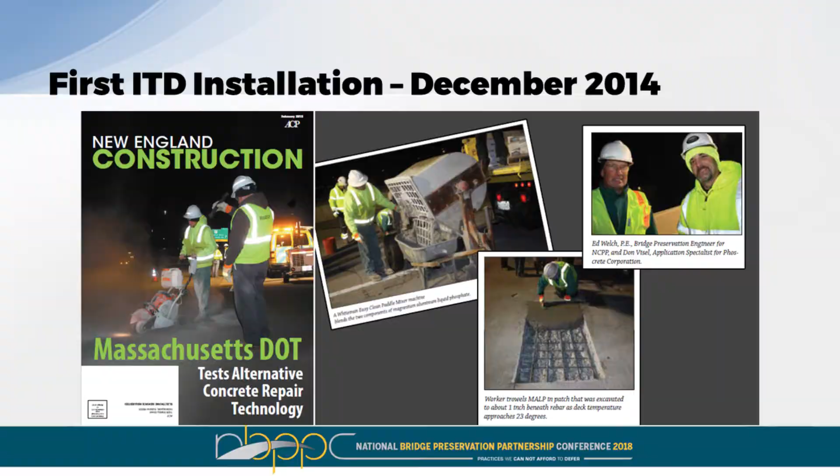3.5 years ago, MassDOT was one of the first invited agencies to hold a demonstration, and they selected a bridge on I-190 near Exit 1 in the city of Worcester that crosses over the Providence-Worcester railroad tracks. And you have to know how to pronounce Worcester.

Does Mohammed Nabulsi happen to be in here? Hi there, Mohammed. This was your project and your crew. A bunch of key MassDOT personnel were on staff, including Mickey Spillane, who was the assistant bridge engineer. Phoscrete Corporation's representative was Don Visel, our installation application specialist, and a young Ed Welch, PE for bridge preservation for the NCPP. He was on site as well to represent the AASHTO TSP2 program.

So the manufacturer's involvement is pretty straightforward. We provide on-site installation support. We contract and compensate the consultant to document the information, and we're responsible for following up on all the follow-up inspections. The independent consultant is really the key to the success of this program because the independent consultant will document all of the installations, the good ones, the bad ones, and the ugly ones.

And finally, the owner's commitment is to identify the location, to purchase the material used for the repair because they've got to fix it anyway, to provide mobilization and installation, and to perform scheduled inspections. From the manufacturer's experience, Phoscrete's MALP technology was the guinea pig for this ITD pilot program. Our magnesium alumino liquid phosphate concrete repair materials are cementitious materials that don't use Portland cement and don't use water.

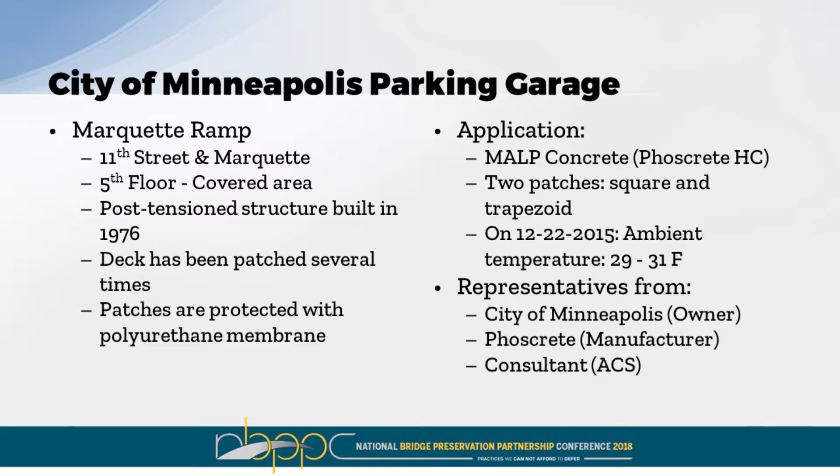The application entailed just a horizontal concrete repair, 2 patches that in the slides I called square and trapezoid based on their shape. It happened at the end of December in the morning. The temperature was between 29 and 31 Fahrenheit.

There were quite a lot of people at the application. 4 people from the City of Minneapolis, 2 engineers and 2 people who were experts in application, the technical consultant from Phoscrete, and myself as an independent consultant.

As for the size of the patches, the trapezoid patch was 2 by 2 feet, 4 inches deep, and the bars were free, so the concrete was removed beneath the bars, while the square patch was almost the same area, 2 by 2 feet, but less deep, so the bars remained partially embedded in the concrete.

Classical procedure for concrete patching: cutting the edges, cleaning the rebars, concrete surface profile 5, and dry concrete, because this is an important requisite for MALP concrete.

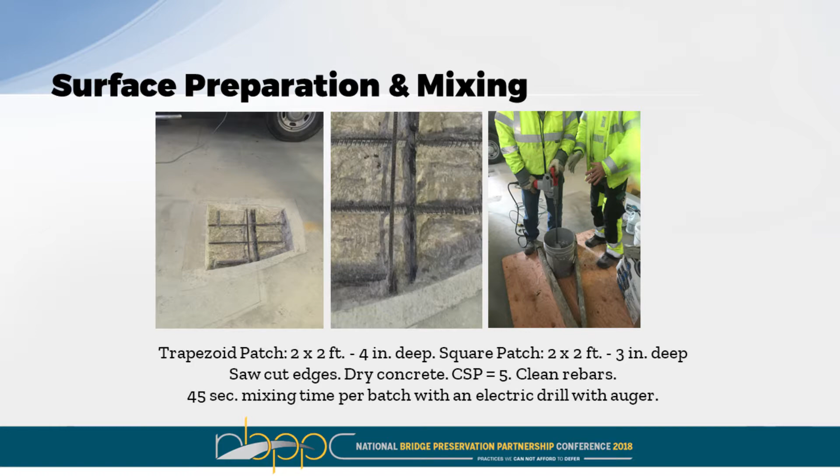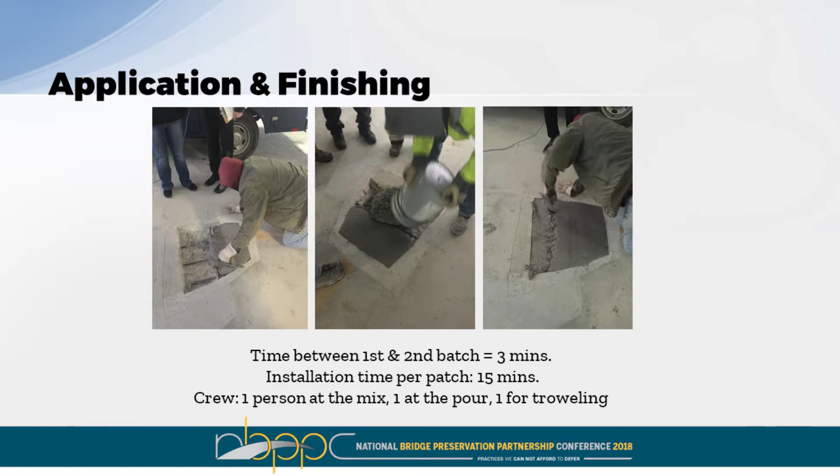45 seconds up to 1 minute of mixing time with an electric drill and an auger, and 3-5 minutes time between the first and the second batch. It took 2 batches per patch, and didn't take more than 15 minutes to complete each installation. 3 people working, 1 at the mix, 1 at the pour, 1 for troweling.

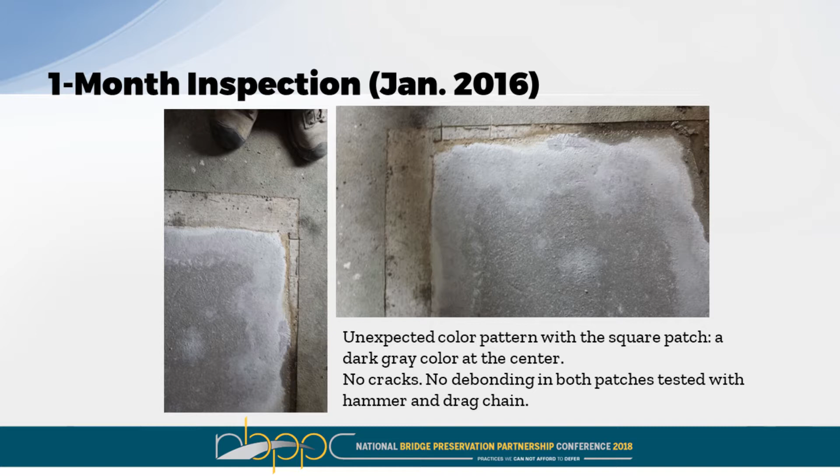The installation was completed between 10 and 11 a.m. At noon, the parking was reopened to traffic. Those 2 areas were reopened to traffic. Then I came back 1 month later. It was even colder because we were in January, and everything was fine, except that the square patch had a sort of dark gray area at the center. It looked as if there was a puddle of water, and we couldn't explain it. It was only in one patch, not in the other patch.

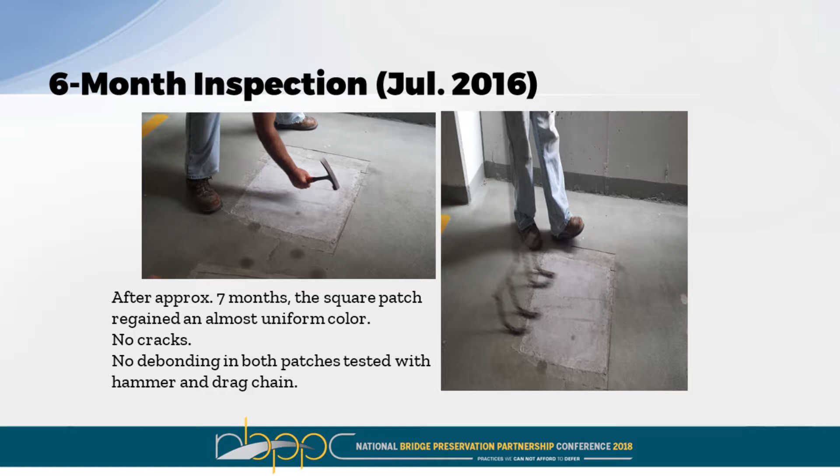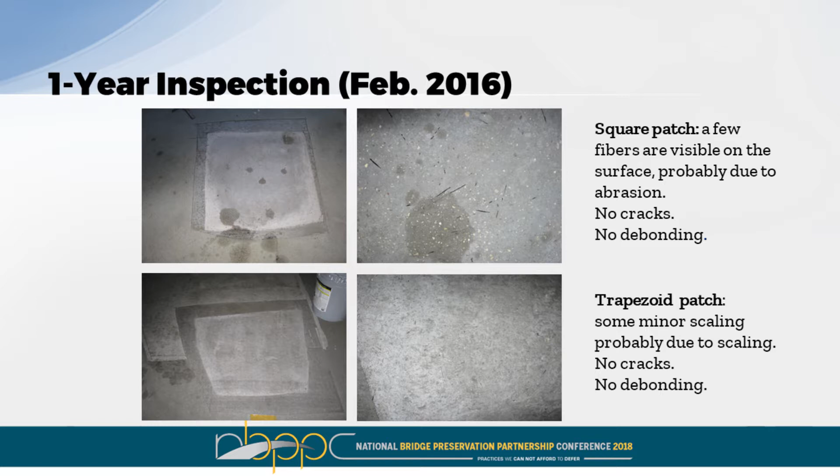Then we tested adhesion with the hammer and the drag chain. At a 6-month inspection, the dark area disappeared. Again, testing adhesion with the hammer and drag chain. No debonding at the edges, no cracks. After 1 year, we start seeing something different. For example, the square patch showed some fibers on the surface, probably due to the abrasion. And the trapezoid patch showed some minor scaling, probably due to scaling by the deicing salts. In both cases, no cracks, no debonding.

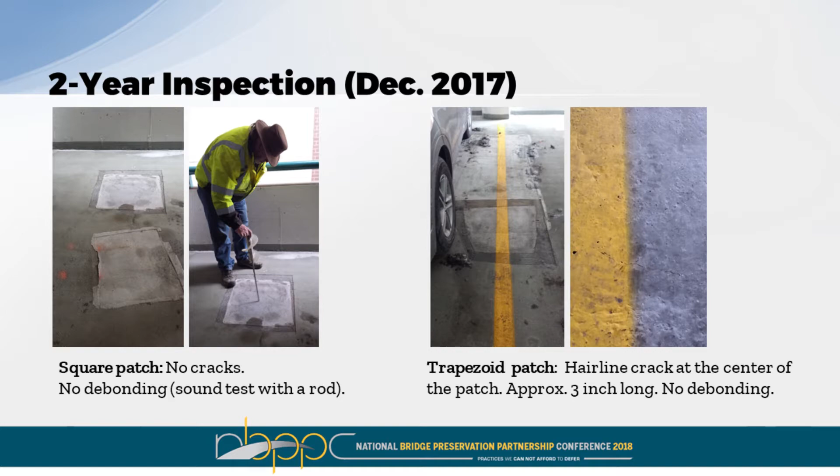At 2 years inspection, we finally saw one crack. It was in the trapezoid patch, a little hairline crack, about 3-inch long. No debonding, and the sound test. This time we didn't have the hammer, we did it with the rod. In both patches it went well. Now the goal is to go back in 3 years for the 5-year inspection.

City of Minneapolis is happy with this installation. They are not going to protect the patch like they do with the other technologies, because even if the patch is not particularly aesthetically pleasing, it's just gray concrete. For them, it's a big saving if they can avoid covering the patch with a membrane. And they also wanted to evaluate thoroughly the durability of this MALP concrete Phoscrete technology without any protection.

Thank you very much, Lorella. Next, I'd like to invite Walt Peters. He works for Oklahoma DOT and Bridge Division. He's an assistant bridge maintenance engineer, graduate of Texas Tech University, married with 3 children, and he's up 2 grandchildren on me.

So from the owner's perspective, I just see a lot of salesmen. Everybody's got great products. Sometimes we refer to it as snake oil. Sometimes it's great stuff. So I need to figure out what works. And to do this, we have some bridges with soffit issues in our state. We used a lot of bridges for a while where we put epoxy green steel on the top layer, and we put black steel on the bottom layer. And inevitably, we have these 5-foot openings in our TRL or our parapets, and a lot of moisture runs under the bridge, and the next thing you know you're losing your concrete on the underside of the rail. So I thought this would be a good challenge for this product. If it's going to work in that application, it'll probably work in a lot of the different corrosion issues that we have in my state.

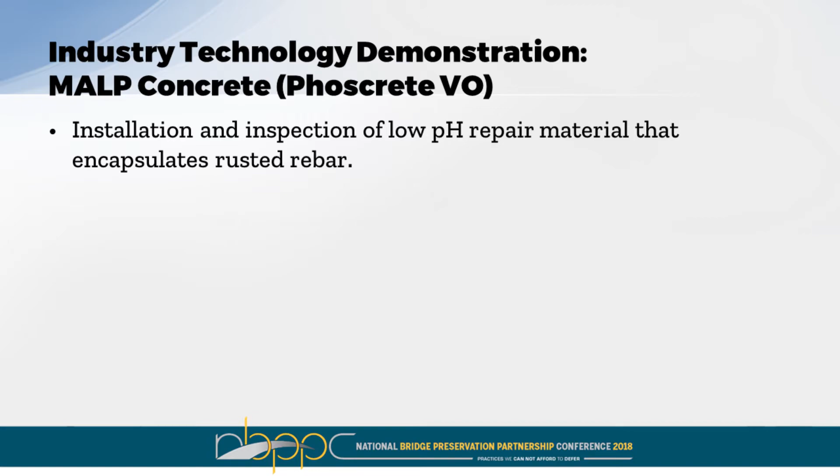So I understand that this product has a pretty low pH and that the halo effect is prevented mainly because it's going to have a lower pH than the remaining material, even if you got a little bit of carbonation or something. So we want to put them to the test here. In western Oklahoma, it's really kind of in the middle of nowhere, very sparse population. But we have a maintenance yard out there in Shattuck, Oklahoma. And so we met there. The Phoscrete guys came and met us, and they demonstrated their product, gave us a little instruction on how to properly apply it, which we're grateful for.

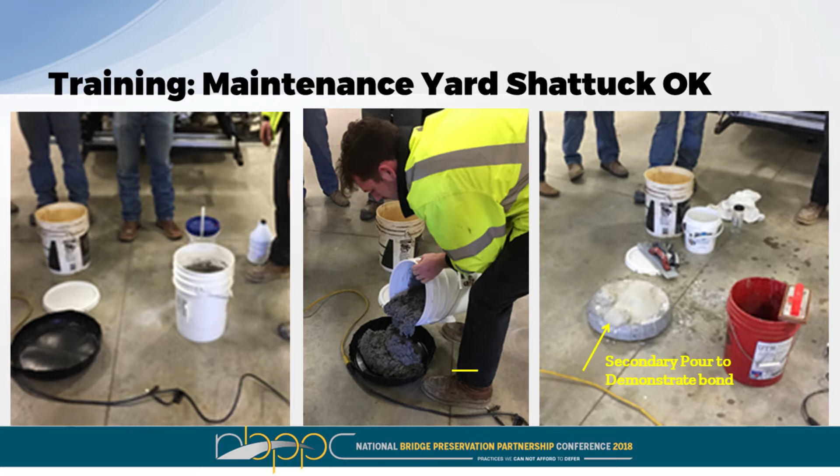So in this demonstration, he cut a garbage can bottom off, and he mixed some Phoscrete, filled it in the lid there. It got really, really hot. And then after a while, when it cooled off, he mixed a secondary batch, and he poured some little secondary pours there, which he could use as handles to lift it up to demonstrate the bond, which was impressive.

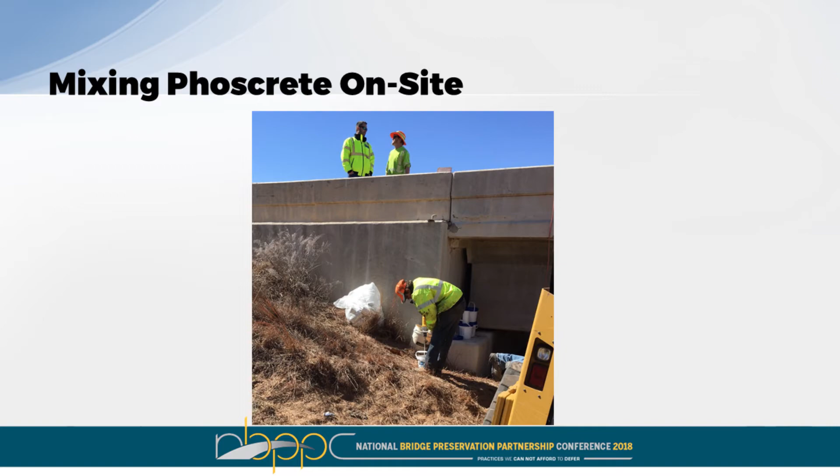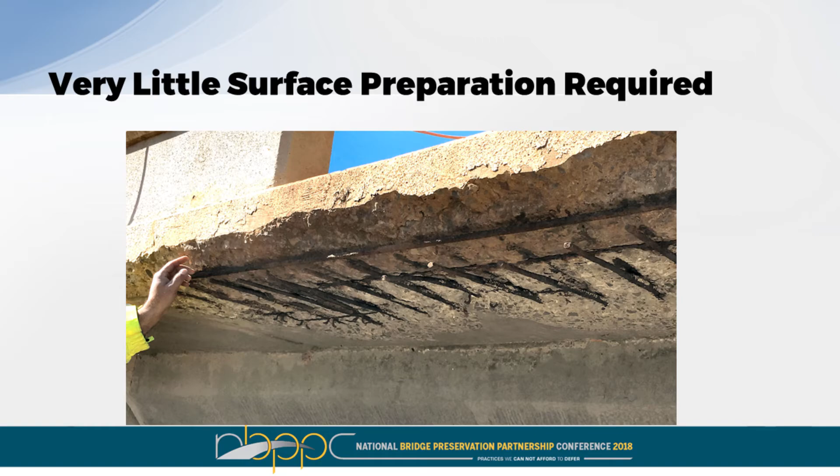So here we are at our bridge site. This bridge over the Canadian River is probably about 3,000 feet long. I didn't look it up. It's on US 283. It's about 50 miles north of Interstate 40, and it's about as far west as you can get in Oklahoma without going into the Panhandle. Like I said, we had a little problem with our cantilever here. We're seeing a lot more rebar than I want to see. And that opening's 5 feet long, so you go about 2 feet past either side, you're ending up with about a 10 by 2 foot section that you need to fill, and probably in places it has about 4 inches loss out of our 8-inch deck. Not everywhere though.

So I was looking at some of the pictures, and I could even see some of the bar chairs that supported our deck originally. So with that exposure, the bars are kind of hanging down. This is going to be a good challenge for these guys.

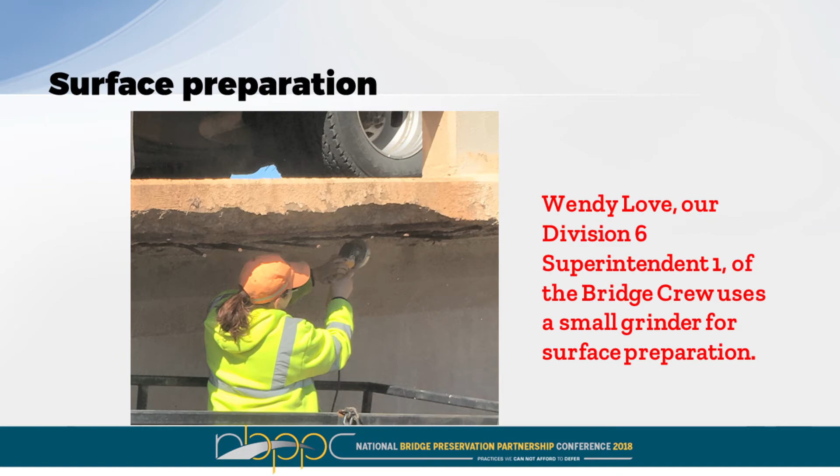So the next thing, I got this picture of Wendy Love. She's out of our Buffalo Division 6 office. She was doing the surface preparation, which in this case consisted of using a small grinder. And she did a good job, I think, but we didn't spend a whole lot of time on surface preparation.

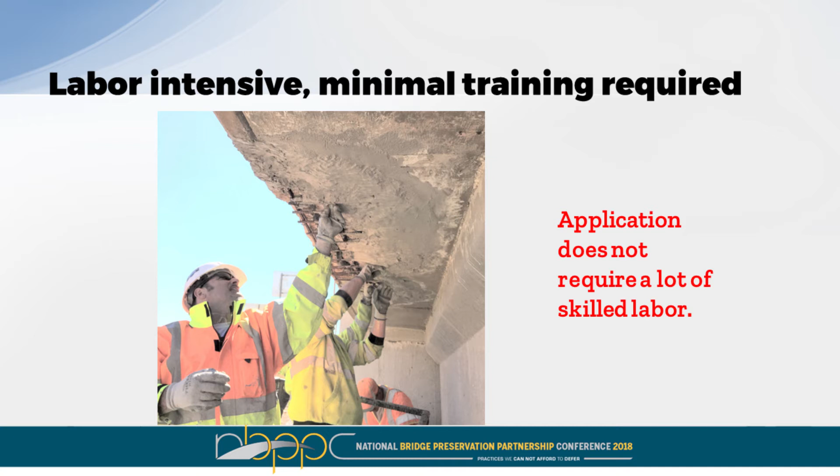So the next thing we see is the guys taking the Phoscrete VO out of this little pail. They're taking it up in their hands, and they're physically pushing it up into this deck. And we got 2 Phoscrete guys working. They were great workers. And 2 of our ODOT personnel, and we had numerous supervisors out there, typical for a demonstration project. But anyway, we're trying to learn something here.

And it took them maybe 3 hours or so. The way we did this was very labor intensive. Had we used shotcrete, it would have gone a lot faster. Nevertheless, we got it done. So after it was done, it got pretty late the day we did it in March. So I came back in April and looked at the repair.

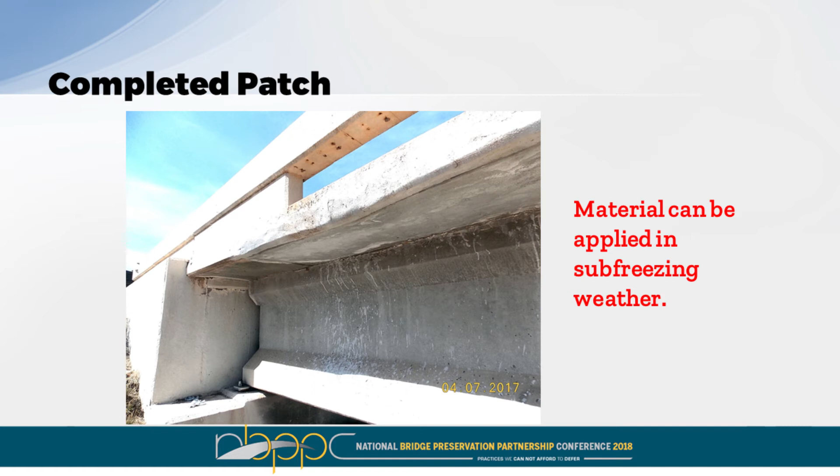And for one thing, I was very pleased to see that they reestablished the drip bead. And it looked like they did a pretty good job of putting a pretty good volume in concrete when you consider it's being done by hand. And they kind of reestablished our soffit there.

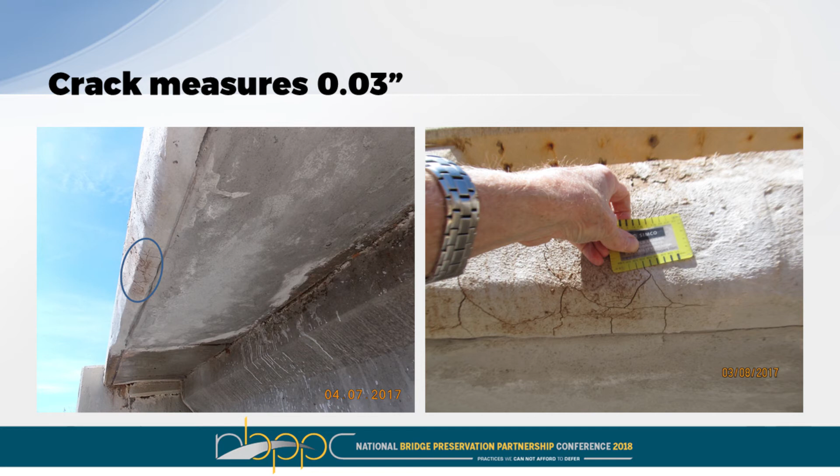I did observe one concern, and that was I saw a few cracks, but interestingly, the cracks were limited to the curb area, the side of the deck, and kind of under the deck up to where that drip bead was. The cracks measured about 0.03 inches, maybe some a little more, some less. And it was just like a 1 foot long by 4 or 5 inch wide area. It was very localized. And I don't know if that's shrinkage or...

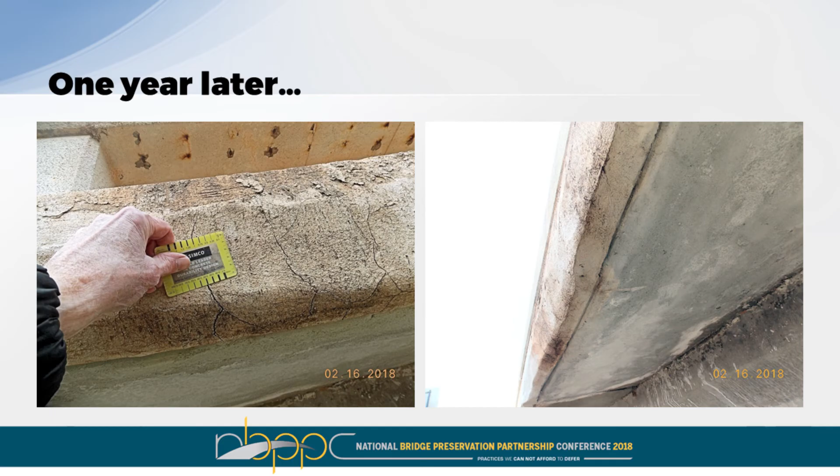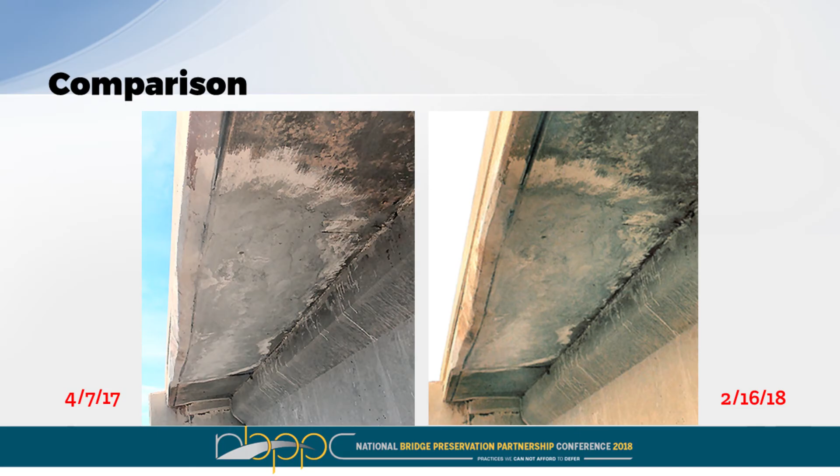I came back a year later, so it was done in 2017. I came back in February of '18. It was originally done around early March of '17, so that's approximately a year later. It just didn't look much different. I was seeing exactly what it was the previous year. So that was impressive. Also, I was somewhat thankful.

Here we see some more pictures, and look in either direction, it just looked pretty much the same. Here I show a comparison, and other than being a little darker, perhaps from water staining, it really looks exactly the way it did April '17 to February '18.

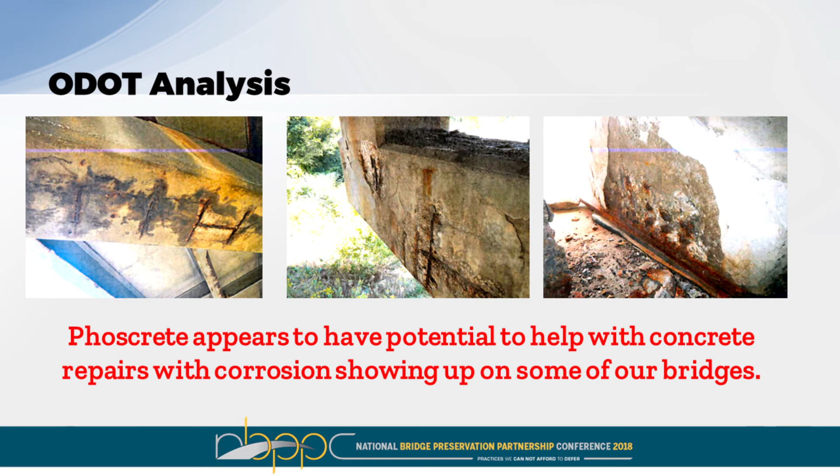So for comparison's sake, I took a picture of an adjacent area that showed some rust stains, primarily in some bar chairs, and I see enough efflorescence and cracking to think we're going to be repairing that pretty soon, one way or another. I do think if Phoscrete works good there, then I might want to try it in some other places, like on some pier caps and on some of these pre-stressed beam ends where I got the very end of the beam with exposed strands. I thought this low pH material might have really good potential.

Our ITD challenges: the manufacturer needs to collect the data, to train properly, and to report the problematic installations. The consultant needs to collect the pertinent data, not too much, because if it gets too much information, it's not helpful. Establish a relationship early with the owner, so when it's time to schedule inspections, they have that communication going. And finally, the agency needs to make a commitment to follow up over a period of time so that we can document this very well.

There is a TSP2 working group. There's going to be an application posted on the website. Please feel free to contact me, Ed, or Lorella if you have a product or service you would like to bring into the ITD program.